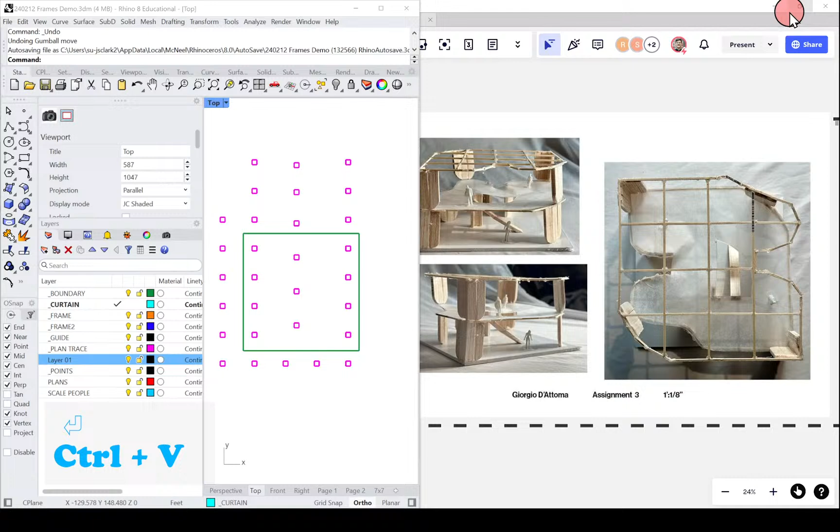The YouTube last semester, is it easier? I don't know, I can hit one button and it live streams, and with all the students in the annex, half the people watched live, half watched it on YouTube. And those streams just stay on YouTube. Exactly, yeah.

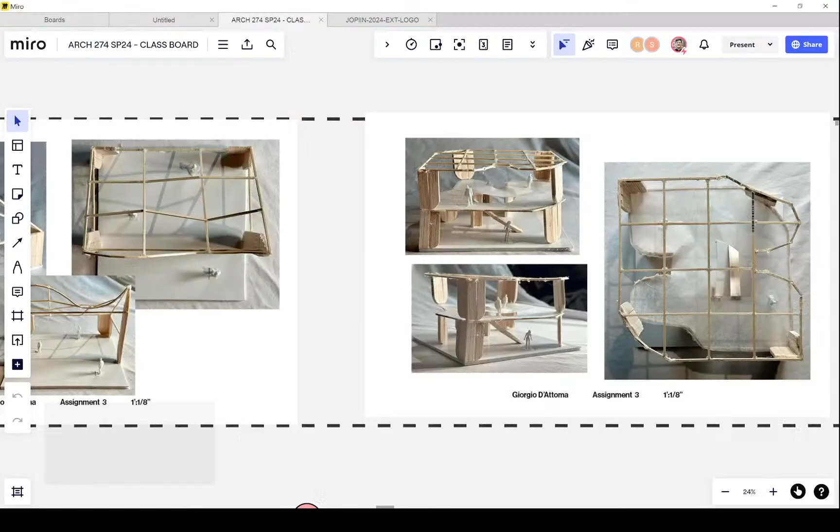First things first, the Miro board is really empty. Part of the agreement in the syllabus, which is a contract between you guys and the teachers, is that you guys are going to upload progress images every single week. So when we see empty Miro boards, we assume no progress.

It's very simple, I would like you guys to get in the habit every week. You could do it end of the day, Thursday is a great time. Set aside like 20 minutes maybe at the end of class on Thursday to document whatever it is that you did. Maybe it's on Friday, but at some point every week, make a documentation of what you did. It does not mean it has to be your quote final images of the models, or perfect renderings of your digital models. It's literally just screenshots and iPhone or Android photos of whatever you've got.

Progress. We're doing this not to torture you guys, but to turn you into productive, effective coworkers. When you guys graduate and start working in teams, if you have a habit already installed of constantly sharing, oversharing your work and your process, your bosses and your colleagues are going to be super grateful, and you will remain employed.

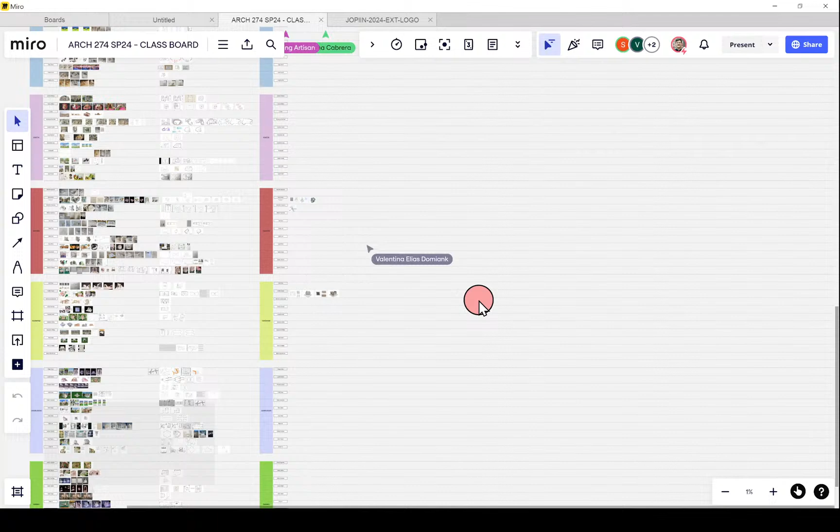If you're the type of person who says, no, I just work at my desk and I'm only going to show you when it's good and when I'm satisfied and when it's, quote, done, you will not be employed for very long. So this is kind of a way to set up healthy habits for your future employment, but also for just where we are right now, studio, in school. And your homework, if you guys need me to tell you, your homework in order to get a grade is to upload your progress. So please do so.

We see a couple on here, so for those of you who did upload something, fantastic. We love it.

What we're hoping to achieve by today is a few, using Giorgio as an example here, like 3 physical models. And when you've been testing these ideas, where we're remixing these 2 different plans together. This week, we would like you to first finish this, because I'm not seeing pictures, I'm gonna assume it's not done, so finish that.

But we're also gonna move into starting to craft some digital models, so some digital kind of mock-ups to help us think about how maybe these physical models can be created, but definitely to help us think about the next assignment. We're gonna have basically one more official assignment before the midterm, which is going to be like a digital drawing of one of these ideas.

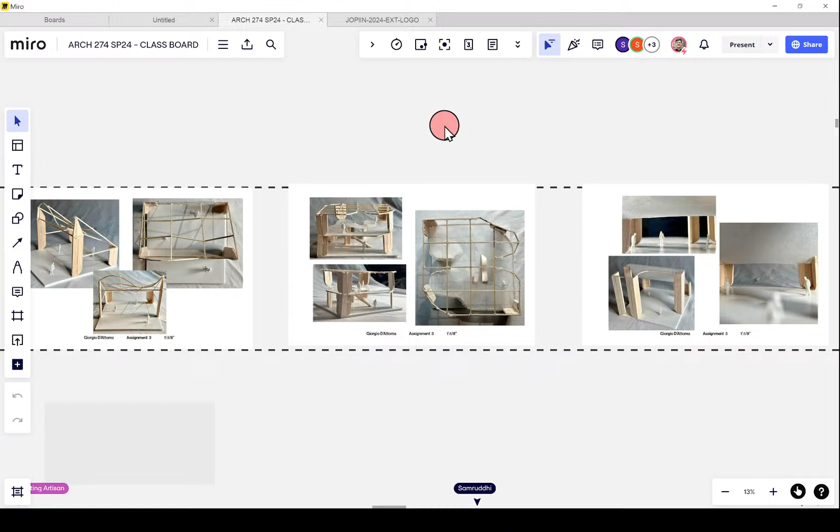So you've been kind of amassing a little family of ideas. You're going to eventually pick one, you're going to elaborate. But for this week, you're going to continue iterating, you're going to continue designing. So the goal for this week is to keep working, keep designing. Don't pick a favorite quite yet. You should be considering multiple options, okay?

I did want to maybe start with a little graphic novel here. I showed you guys some images last year from my friend Jimenez Lai, who runs the firm Bureau Spectacular. He wrote this graphic novel, Citizens of No Place, that imagines different kind of architectural conceits seen through the lens of 2 astronauts. It's basically a stand-in for him and his friend Andrew Kovacs to have arguments and discussions about architecture.

He uses the format of the graphic novel to kind of illuminate different qualities of architecture. And I use architecture in like a capital A sense, like embedded things that any architect, anyone who's been through school can get in a debate about. It's kind of the Socratic process here seen through the lens. I think this is Jimenez and this is Andrew, the big guy with the mustache. But this was a particular story about this kind of depressed figure.

There's a lot of depressed figures in his stories who is in space, so there's not really gravity. He's thinking about how this grid of space can deform to the human body, thinking about different programs or uses. This relates a bit to what we did last year with the body drawings for 172, thinking about how the human body may deform space if we privilege certain dimensions on it. These diagrams in particular are something me and Godone think you guys should contemplate and spend time looking at.

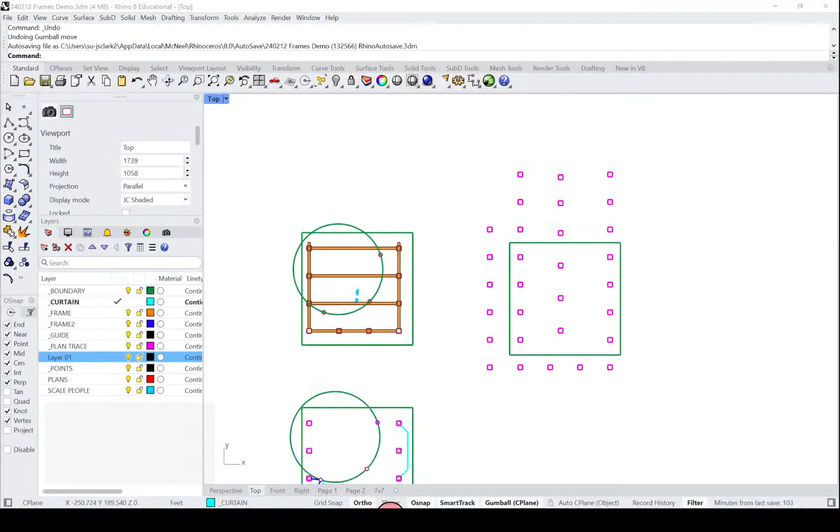This culminated in an installation in the gallery, a test fit of this idea, where there was a static grid, a perfect box grid of points made with string, with little tennis balls at the corners. You could walk in the gallery and push the tennis balls and it would deform the entire grid. We liked this idea that maybe you're starting with the basic grid from the precedents, and deforming them to think about how it might change into something different as you get more vertical.

So anyway, I just wanted to come back to the precedent here, the plans in Rhino, and make sure you guys are thinking about the proper scale and size of these things.

So again, this plan I brought in, and there's already a drawing where I can tell that if I type distance, and do the distance between here, it says 13 feet, based off of the drawing. I just traced this thing.

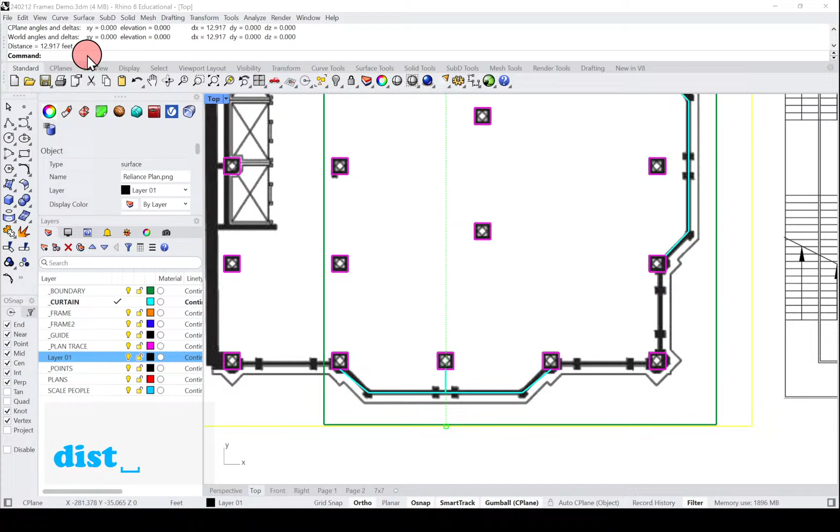This is the Reliance building on the left, and this is the MVRDV Expo. This is a fun one because every floor is a different type of structural truss.

The green box sitting here, this is like your square. This is the 48-foot by 48-foot square, which is a 6-inch by 6-inch by 6-inch square at 1/8 inch equals a foot scale, right? So 6 times 8 is 48. That's how we're getting this size.

So we can see if I overlay this on top of the plan, I'm only cutting out a little portion of it, just a little bit of this overall plan. Same deal for this big guy here, okay?

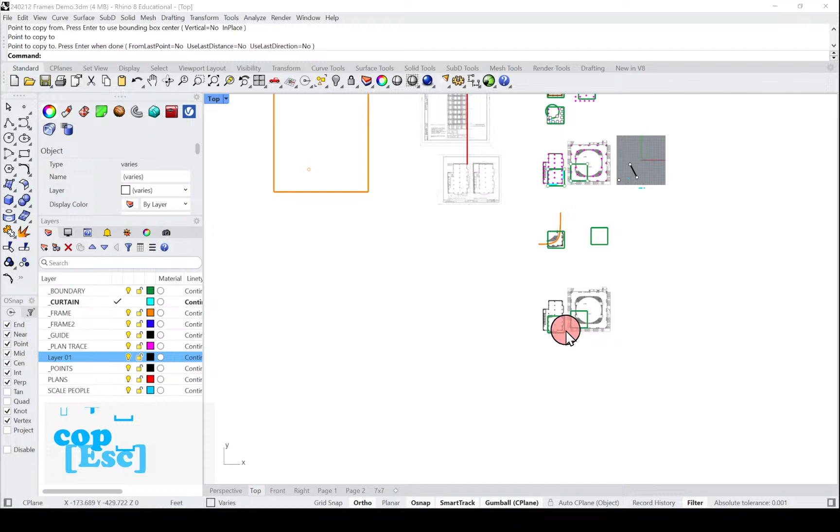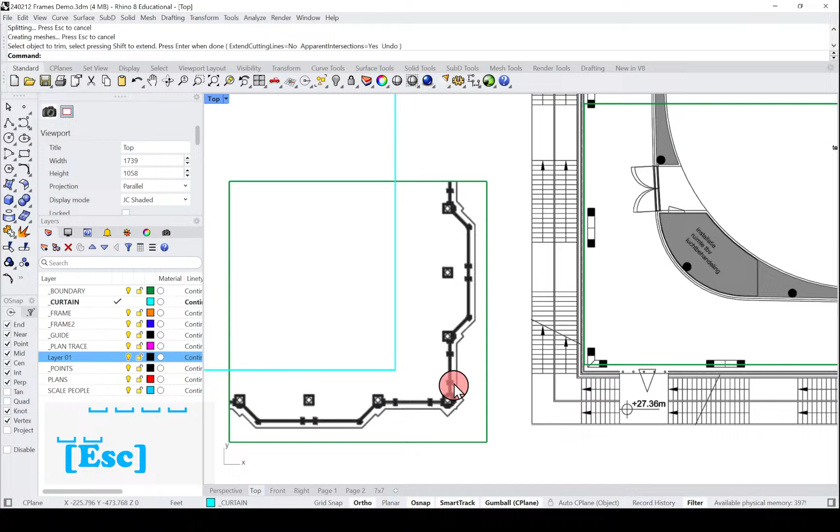So what I could do is take my plans, copy them down, and use, say, a rectangle, and the trim command, and trim out parts of this plan that I don't want. Like that, for example. Maybe I just want the outside of this, and I'm thinking about the relationship of these boxes to the curtain wall.

For this one, maybe I know that this floor plate, what looks like 2 little boxes, is actually because I'm cutting a floor plate, or cutting the plan through about 3 feet above the floor. This is actually a V-shaped truss, right? But I'm cutting through it a little higher, so it looks like 2 columns, 2 vertical things, but it's really from a center point going out to a V. And I should have brought my lines with.

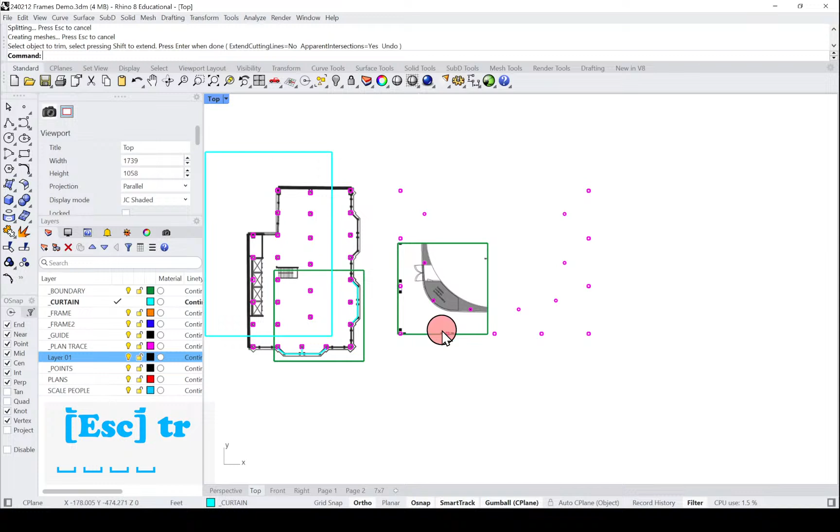The pink is just circles and squares already traced here. So again, I'm going to use the trim command, and trim out the outside. So I can just trim this one. I can imagine, and maybe delete some of these ones, because maybe I don't care about these columns so much.

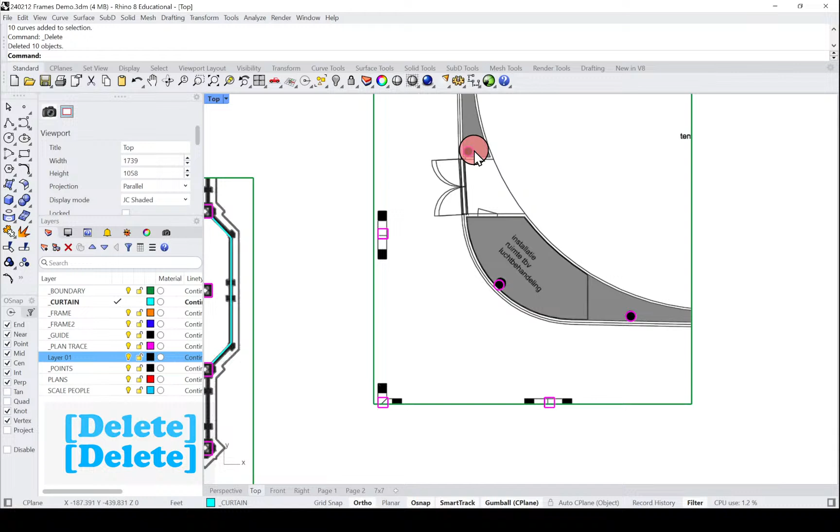And then in Rhino, you're always copying things off to the side. I'm maybe going to delete these, and I'm kind of left with some other squares here.

And I want you to really break it down to its basic points, or break the 3D information down to its basic 3D information. Remember, everything in Rhino is kind of starting from points. 2 points connected make a line. A line extruded creates a surface, and a surface extruded creates a box. That's kind of how we get to something that's 3D or volumetric. But we start from points.

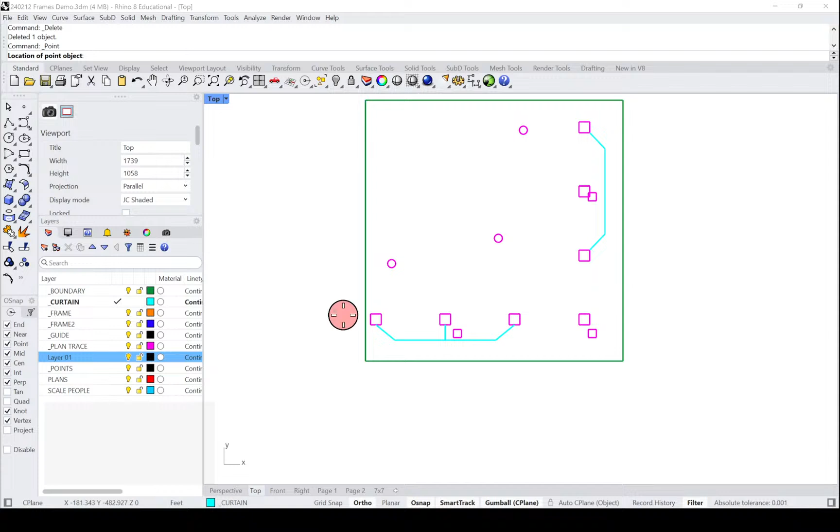And so maybe a way to think about this is to draw points. I've got a little layer here for points at the center point of these squares and these circles maybe.

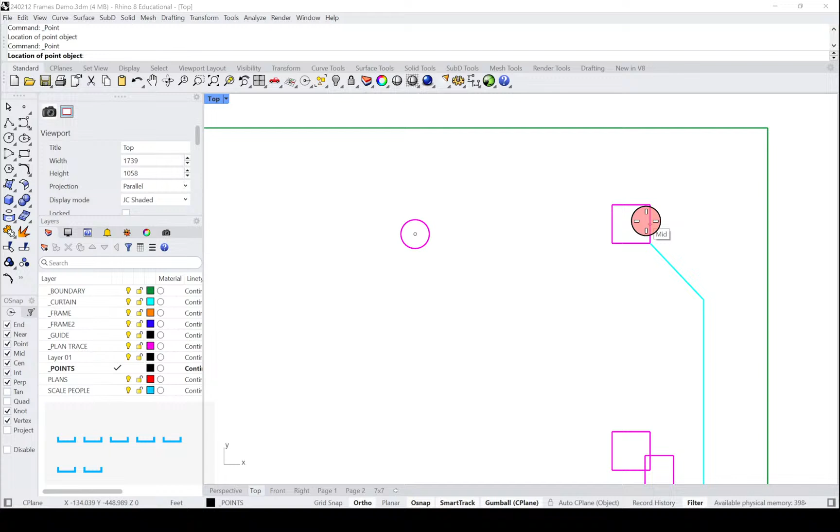You're always going to be choosing to ignore some information and privilege other information. So these little squares, I'm going to delete—these are from the MVRDV plan. It kind of fits on top of this, so I'm going to use the Reliance square plan with the MVRDV circular columns, mashing these together and thinking about how that opens up as I go vertically.

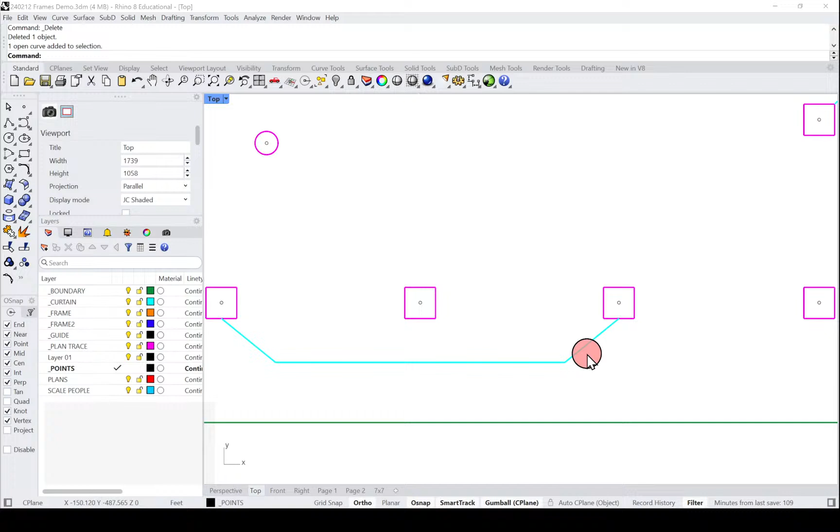The curtain in this case is the bay window, represented by this blue line. So I'm not modeling the mullions, and I'm not necessarily modeling the thickness of the wall yet. I'm just representing this 'curtain,' this wrapper that goes around the outside, as a single line.

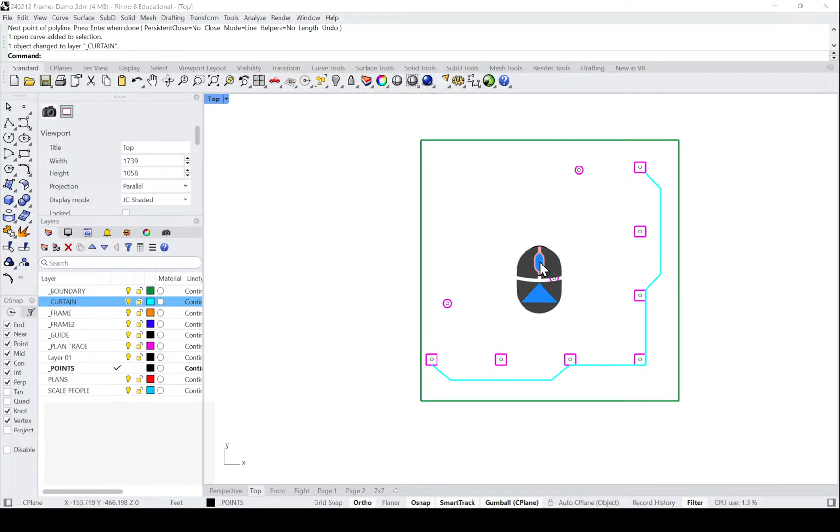Maybe this attaches around the outside to there. I can imagine this is more the curtain—we've got the curtain in blue, and then the columns, or the frames, in pink. Okay, so at this point we can do some things like measure your piece of wood.

So let's see, who's got a piece of wood here. You want to use a scale, but we can use a regular ruler and figure out how thick this stuff is. So this is an eighth—it's a foot in the narrow dimension and two feet in the other dimension. So one thing you can do is make little rectangles that are one foot by two foot.

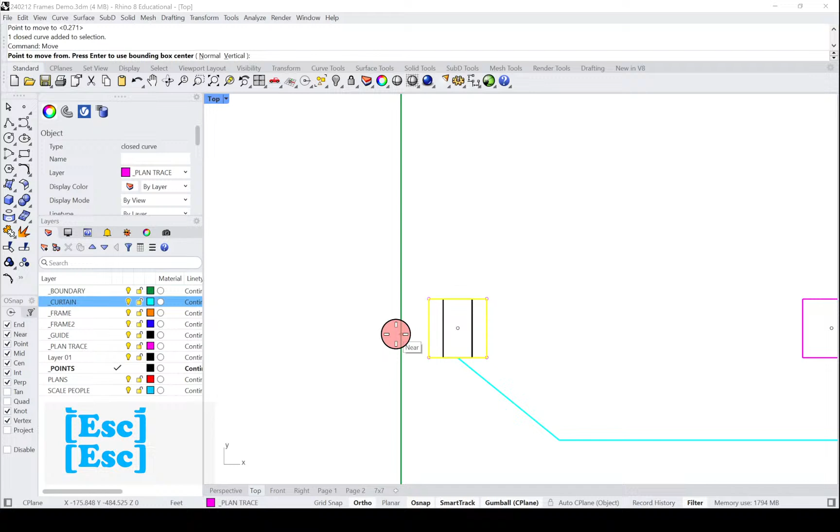And I could move this to my center point. So the pink is what I traced, but maybe now, since I'm making a new model out of this particular piece of wood, I'm going to make a new rectangle that's just that. And we can think about extruding this.

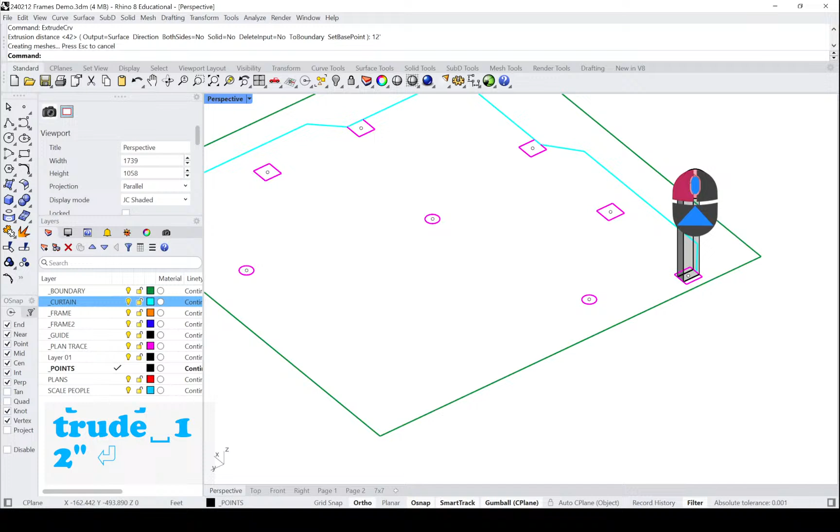So I'm in 3D now, taking this column and extruding it some height—I'm going to go 12 feet. So this would be like the first floor of my model. And at this point, I can start to copy.

Like last year, you can do a lot in Rhino with very basic commands—copy, copy, copy. You can also select points. Let's just select the points, too much stuff here, and I can copy those up as well, because maybe that'll be useful.

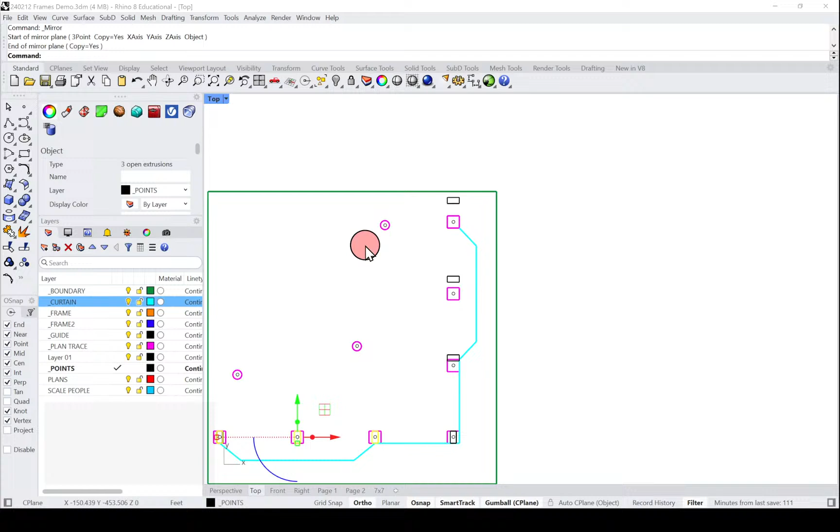Maybe you can use things like the mirror command. These are off a little bit—feel free to use the gumball to eyeball things and get them sort of close.

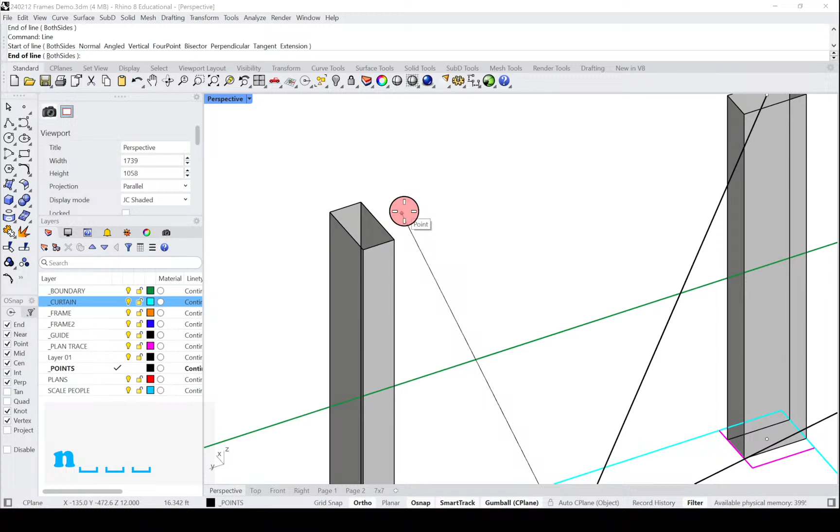But the idea being, now you can also start to draw lines that maybe connect these things to the center points, or maybe you draw lines that connect across this way.

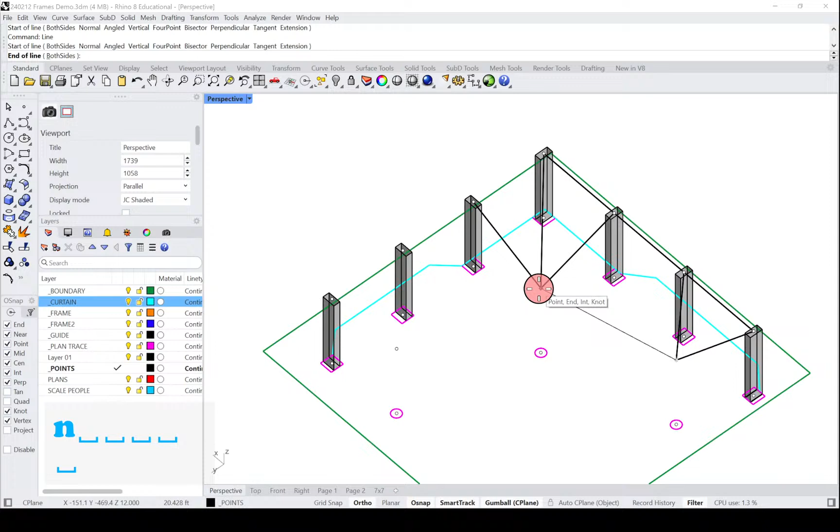Maybe we take all of our points here, we'll do a few more lines. I'm doing everything as straight lines because it's expensive to bend steel in curves, or wood for that matter.

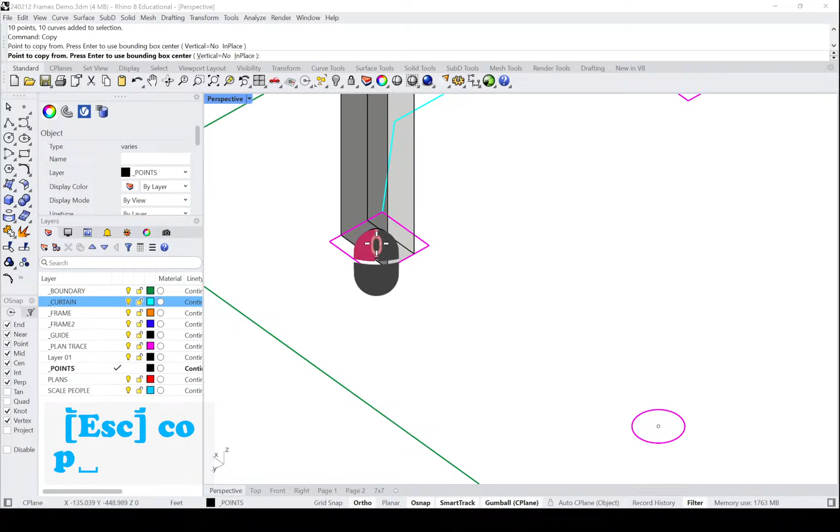I'm going to grab all of these and copy. Let's just keep the same 12 feet vertical spacing. Copy—same 12 feet vertical spacing.

And then now maybe I'm thinking back—the exterior of the expo pavilion has got those diagonal Warren trusses. So maybe I'm going to draw a line between these, or a line between the midpoint, so I start to get like a V-shaped truss thing.

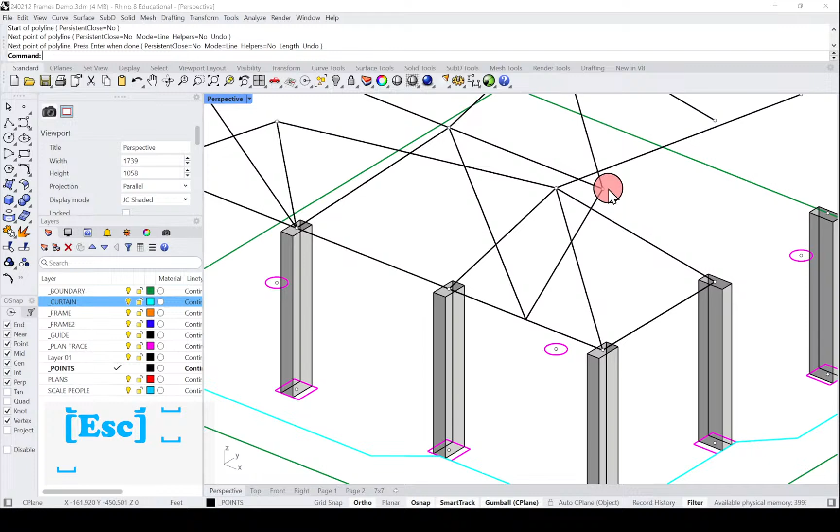Some more. We can use the copy command—we can copy this.

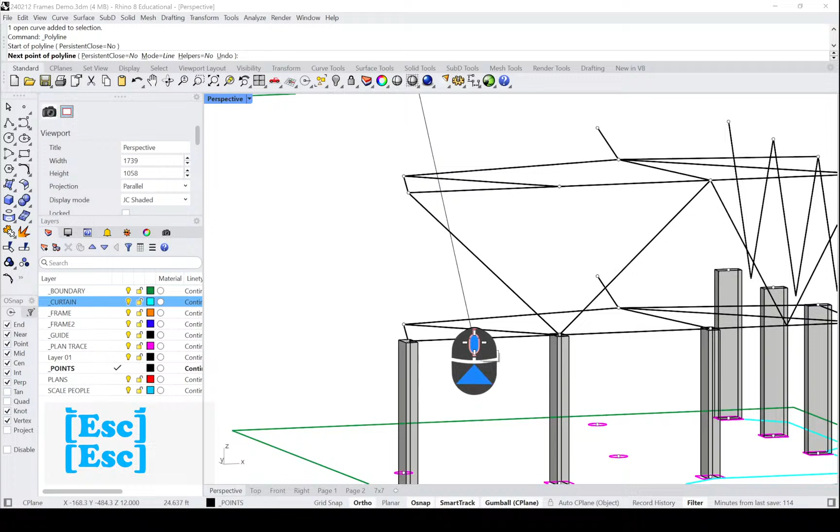Maybe I want some parts of these to be double height. And maybe these center columns are just what they are—straight columns that get extruded all the way to the vertical.

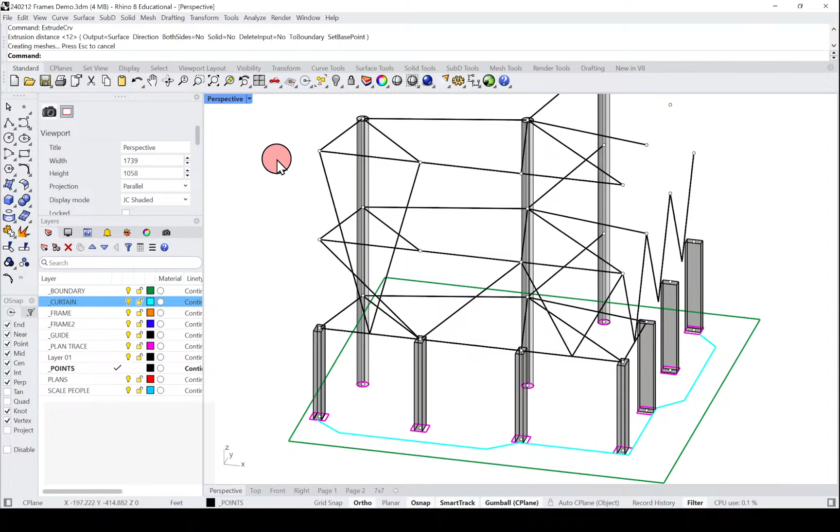And at this point, I'm going to show you guys later using Grasshopper, smarter ways to do this. But for now, for example, this piece of balsa wood that I have...

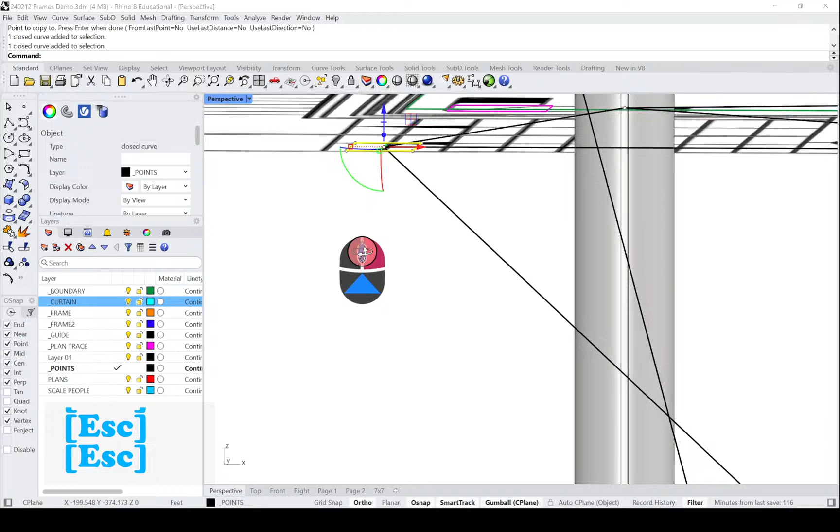If I want to move it along this line, I could—you can see the curve is not perfectly perpendicular with the line, so maybe I'd want to rotate it, but for these purposes, these are sketch models, we're moving fast, so let's just use the sweep command. I can sweep using the rail, the shape—let's see if this works. There we go, boom. So that gives us the shape as the outline.

And then you can change it. Say that you have a different piece of wood that is thicker—it's more square.

Or you're using, I'm seeing a lot of you guys using these bamboo sticks. What do you think, Gadon? Should we use these, or stick with the balsa? Well, they have two profiles. Yeah, so maybe these bamboo sticks are like your smaller profile, and you can have just a little circle that you extrude.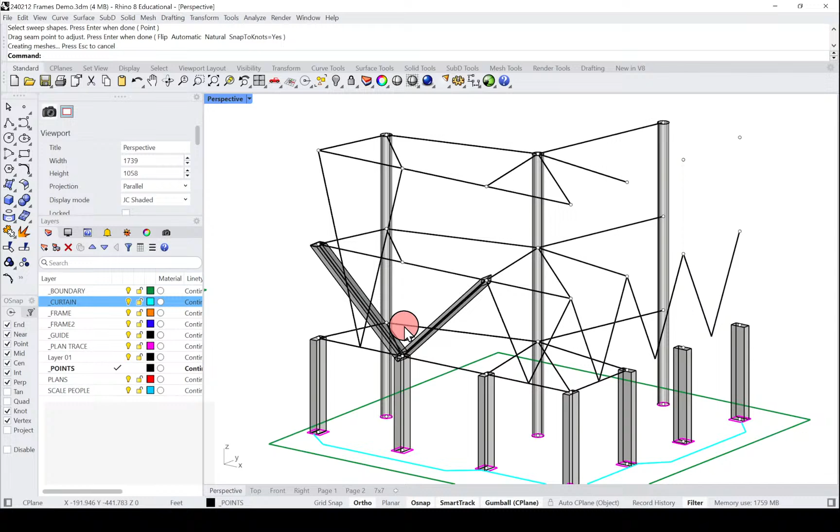Question: should we disregard the use of trace in the digital? Yeah, so for the trace, for example, this here, this is going to be my curtain. We can extrude it, right? And maybe that's there, and I copy it, and I don't want it to be in every floor.

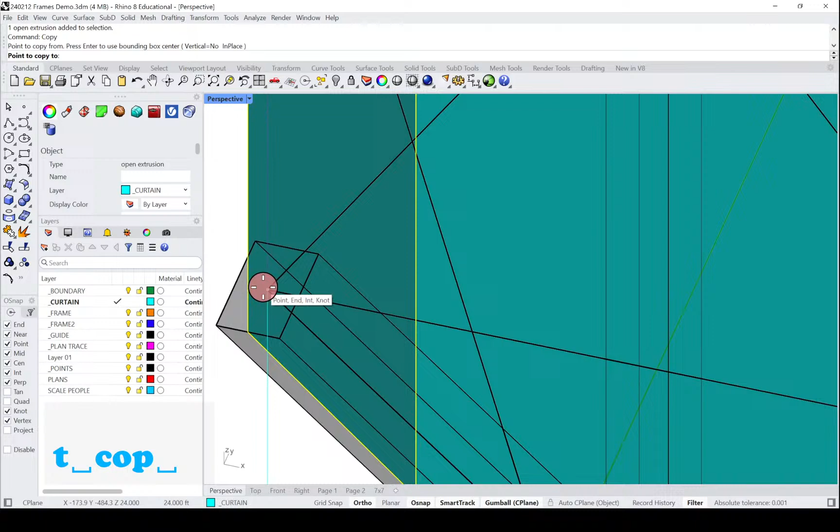So I'm going to skip a floor and go here. Here, I'm going to change it. At this point, I'm making my own building, so I'm not going to worry too much that this is exactly how the Reliance building looks. And maybe this gets squished down a little bit.

So I'm starting to think about this as I go into the top view. Let's get the one on the ground here. Copy. Maybe I rotate. Use the rotate command. And the scale command, same as last year, like scale, rotate.

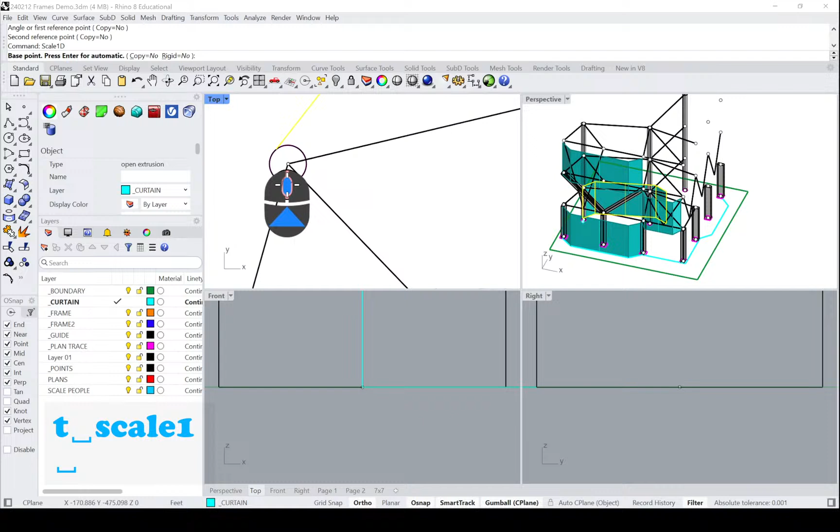Move. You can do a lot with just these. Mirror. So there I'm putting in, that's not great, but...

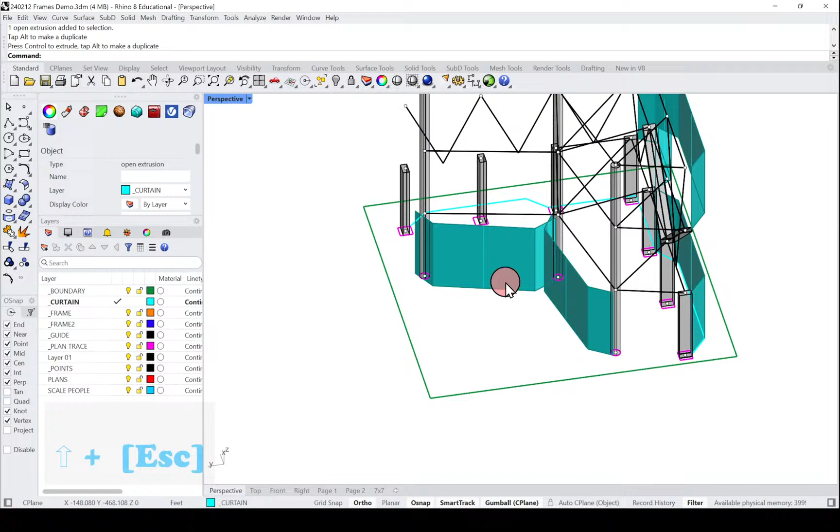Maybe these bays are starting to define maybe what could become an interior courtyard. Scale, 1D.

We're not worrying too much about modeling every single piece of the building, okay? And so there's a very good reason why I'm rendering this just as line drawings here, or let's go back to like pen mode. Mine's better. So it's just what's in gray being the wood, and what's in blue being trace paper.

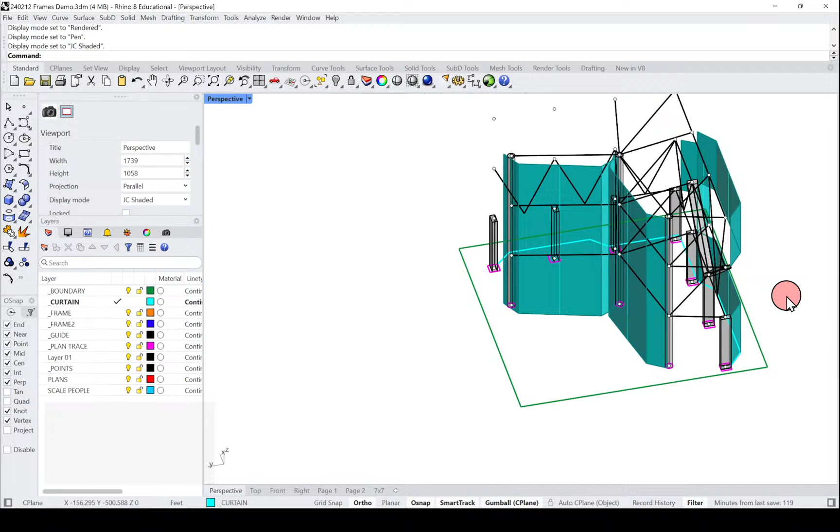We're not going to introduce too many new things, or too much detail. We don't want you to spend too much time modeling things that don't matter. Like the curtain is really just what it is. It's a wrapper for this thing.

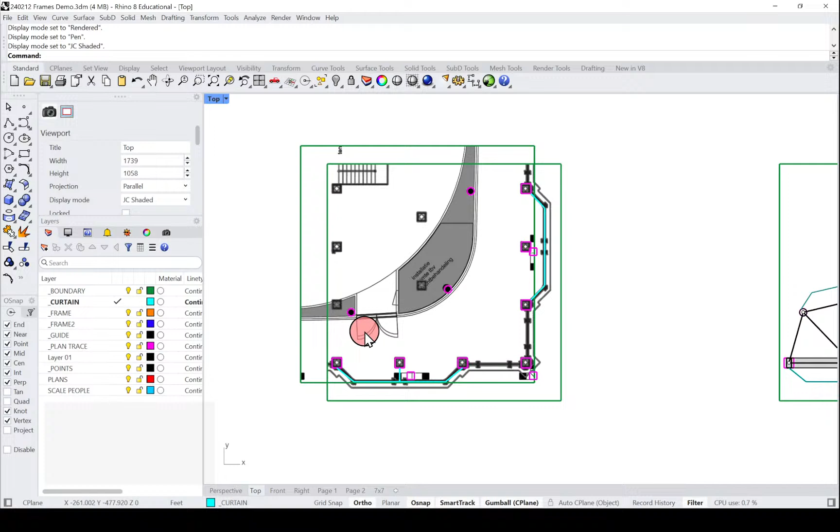So that's kind of like one way I would think about doing this, where you're literally just taking a tracing of maybe your collage plans. Maybe it's a tracing of what I kind of did here, like just a freestyle composition of the two plans going together. Or maybe you're just not tracing your plans and you're using them as a reference.

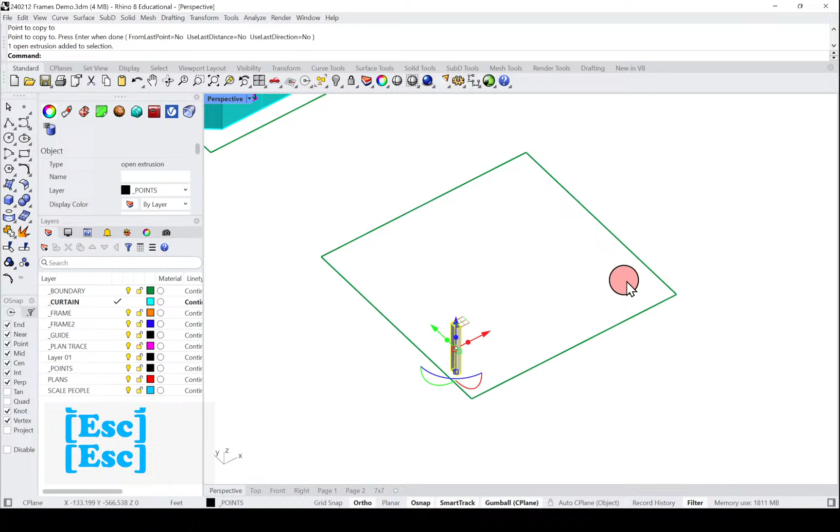So if I was to copy this over, like maybe this one, just the first floor, using the array command. Let's say I array it 4 times by 4 times, and the spacing is 12 feet by 12 feet. Bam, like there's a grid.

And then I was looking at the MVRDV one, for example, and these are gonna be circles that are extruded.

John, you talked about the importance of scale people in your model. Oh yeah, I didn't mention that. Thanks.

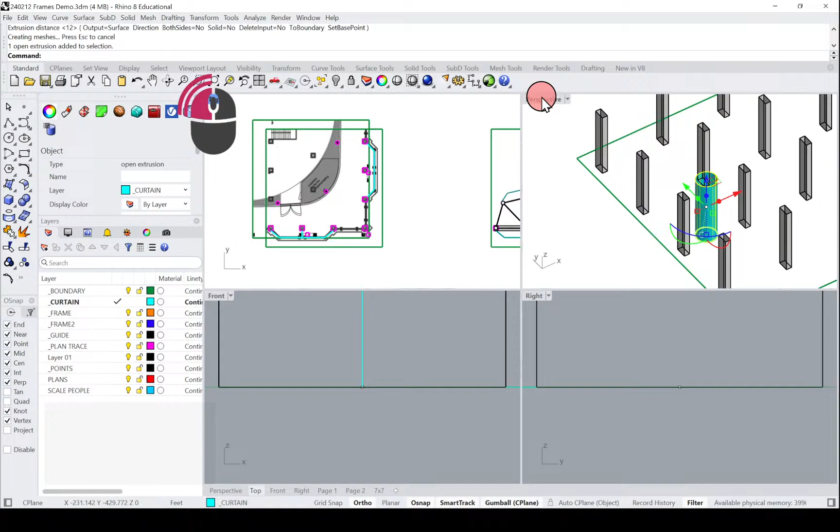You guys all have low poly 3D people, right? From last year? Somewhere. Yeah, use them. So these little scale people versus my building, you can see it's basically like a 50-foot tall structure.

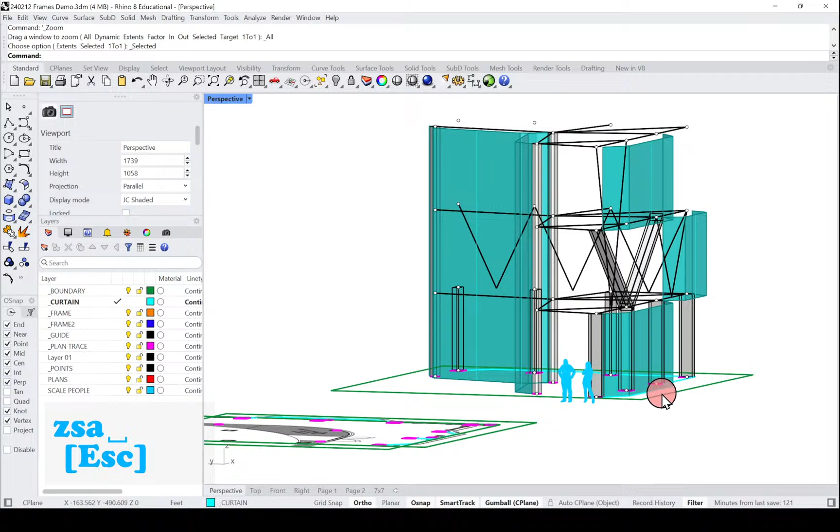In this case, I've chosen 12-foot floor-to-floors. The Reliance building, if you were to, I have it here, actually look at the elevation of it. So this is the elevation drawing, like off of the internet. Here's like a little scale bar, and I can use my distance command to double check the distance of one floor. And Rhino's telling me that it's like 13 3/4 feet.

There's actually like 2.5 feet of space for where the beams are, and then the rest of the space this is all glass, right? And so there's sort of a rhythm in the height. And so if you guys are like, I don't know what the heights are, you can look for elevations of your buildings and kind of work off that.

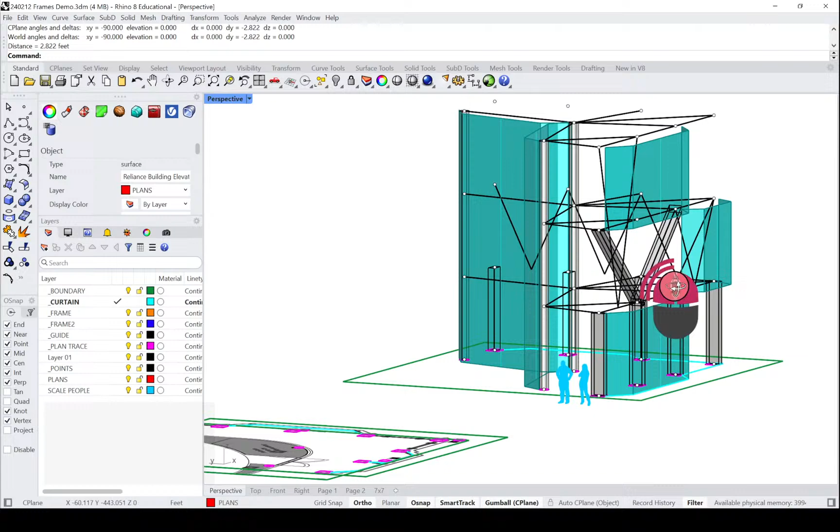Or what I would say is just let's divide up by 3. And so 12-ish feet are going to be a nice way to kind of fill the volume, right? But you should have scale people in your models. If you don't, I can add this file back to the templates folder for you guys to reference.

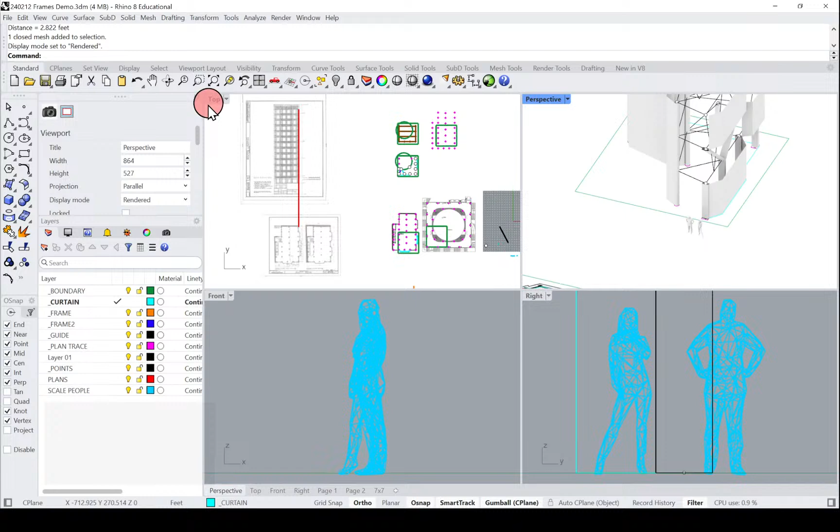All of the drawings are at 1/8 inch equals a foot. So if I was to make a floor plan of this thing, or look at my floor plan, and I was to print this on a piece of paper that was 11 by 17, the scale would be 1/8 inch equals a foot.

It'll fit better on 8.5 by 11. So, you know, everyone's models are that size. But if you're having kind of trouble thinking about how big this thing is, like put the people in there.

I don't want to keep going too long. I want you to chime in about some things that you're thinking about, or things that you would think about when you're going to do this, or if you were to do this assignment, things you would like them to consider.

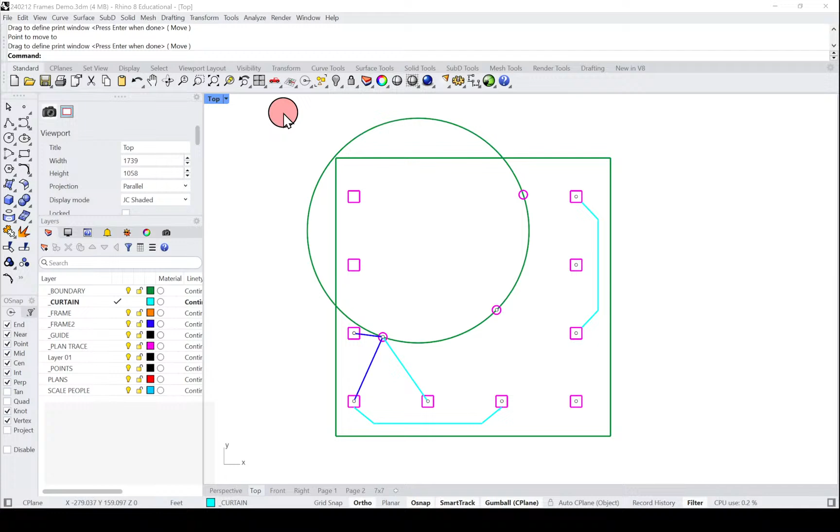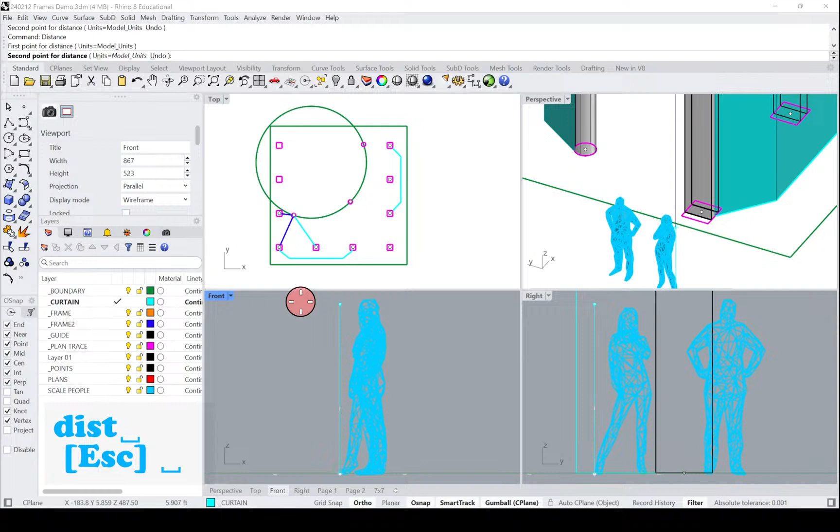Just to note at that point, the important thing is that you're modeling in real world scale, exporting to 1/8 inch drawings. I think it's important to keep modeling, thinking about the real world, because as you transition from this assignment to the next one, you'll be better positioned to move across assignments. Looking at this, what we're asking you to do, I think there's three clear ways to go about it.

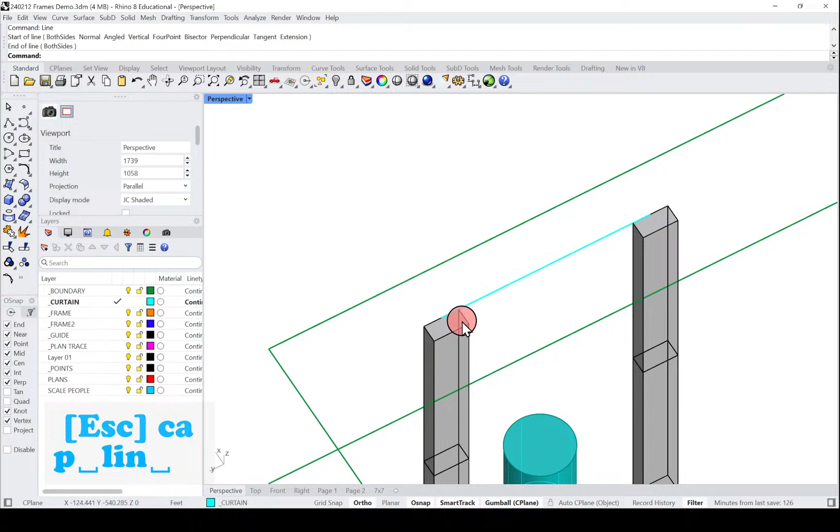And then the third method I would say is to establish a new grid that's based off of your precedent assignment, the mashup. Maybe you see that one column grid is oriented at 30 degrees and the other one is north-south perpendicular. So you can use these two orientations.

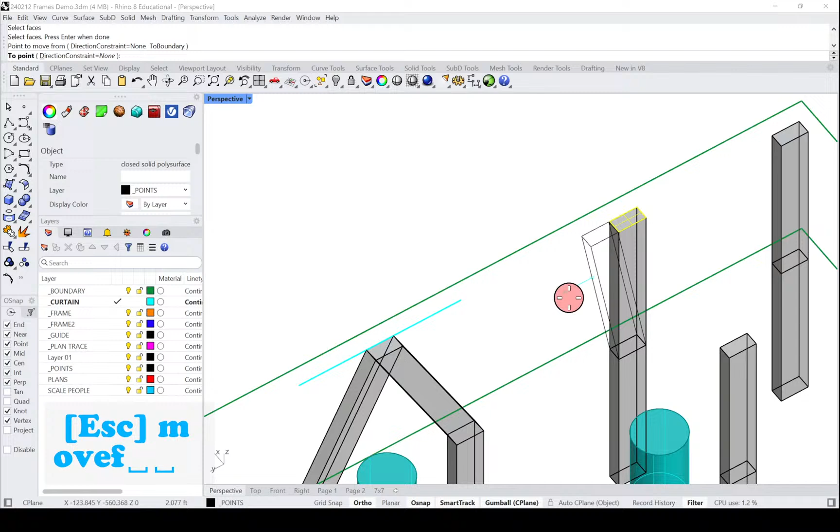You can use this new grid to start to lay out hypothetical column network and beam network. This, I think, the third method is maybe the most inventive of the three, and allows you to discover as you go. I could imagine a drawn grid related to plan, or related to elevation. You could prop it up and it becomes a truss network in itself. So to me, those are the three methods. There are probably ten others you could try, but those are the first three I would go after.

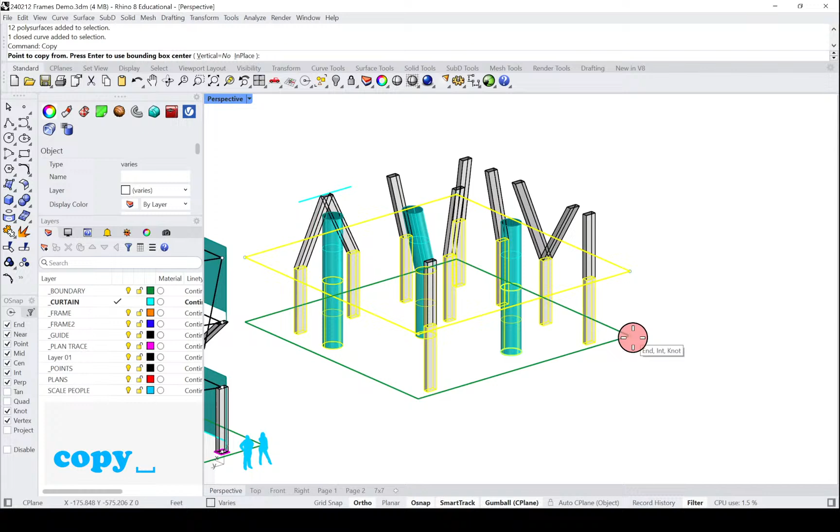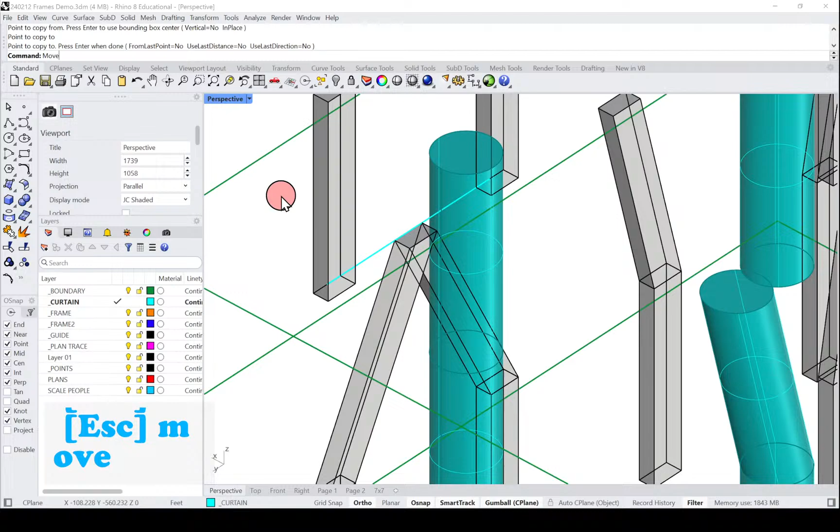And then as you're going, you're obviously inventing. So if you like what you're doing on a specific model, why not repeat it into another one and test it in a new direction? That's how I would approach working iteratively, to self-critique and analyze the moments you're crafting. Like if John says he likes this Y versus A column, maybe a model just becomes about those two bracing systems. So yeah, that's how I would approach the assignment.

And I think it will be more fun once you're in 3D. It typically is, I think for myself, that's kind of working handcrafted because it allows you to test things quicker at a much faster pace.

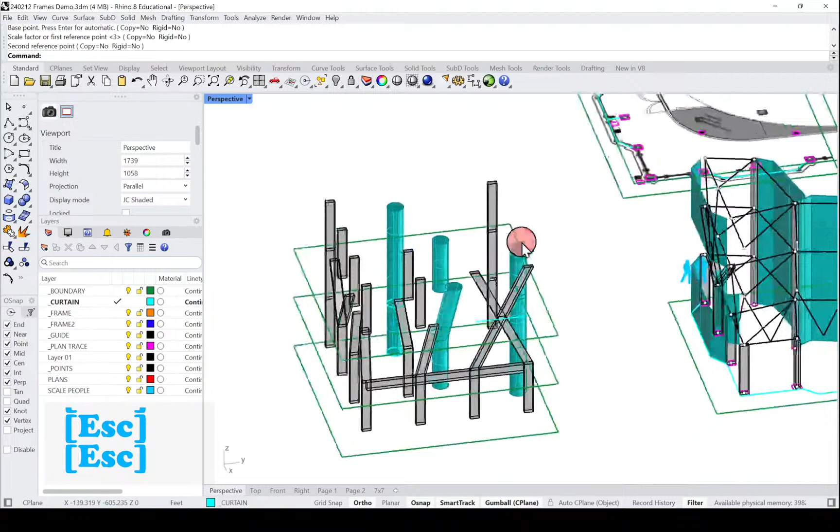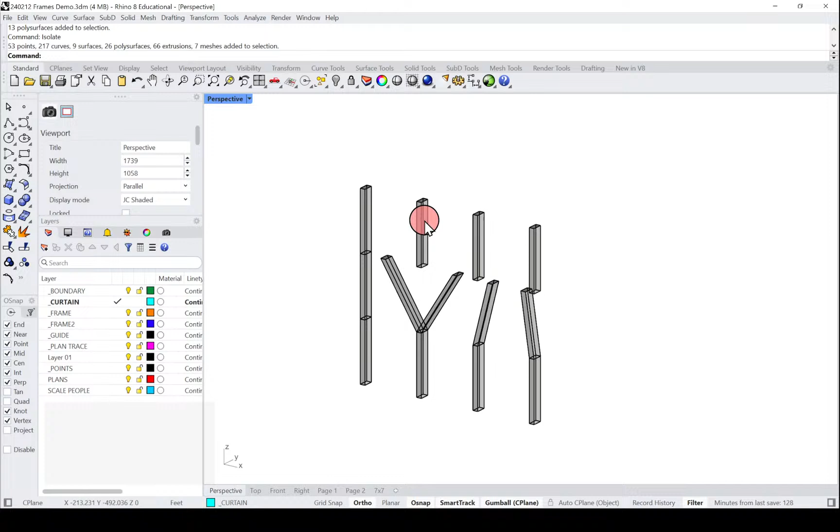What do you think, Kevin? Yeah, so another thing I'm doing here is I'm just using the move face command to kind of shear these things off to the side. For example, this wall over here, if I isolate it, here's a wall, and I just wanted these things to turn into Y's and K's, I could make points, have the points connect with lines, and use the sweep command to sweep my profiles. You guys would be thinking about the profiles.

Or I could just have the profile and then use the move face command. This is great, where I can click on a face, like the bottom of this, select maybe the midpoint, and move it over to there. And that's going to start to connect.

Because you guys are taking structures, you understand maybe the basic idea is even if we have a kind of cattywampus grid like this, if the forces can continue down, the engineers won't laugh. We can keep moving forward with our designs and engineers won't go crazy. We drive them a little bit crazy, but hopefully not too crazy.

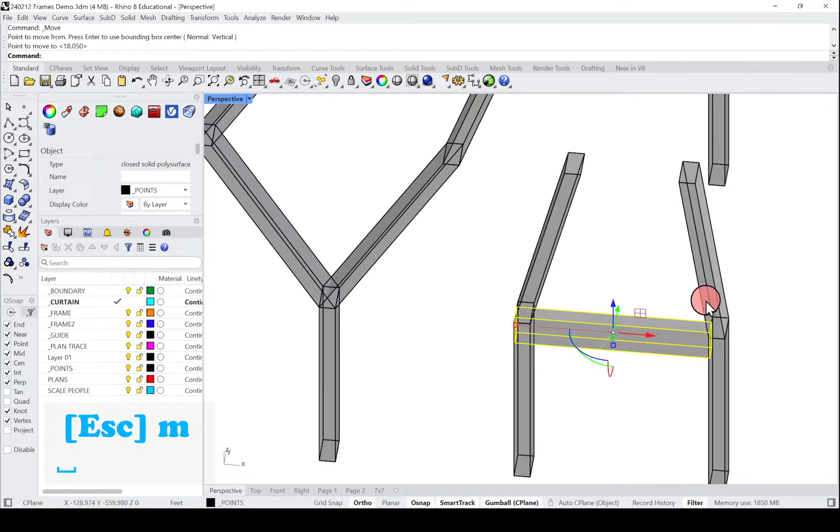And then scale 1D, scale one dimension, so it's basically we'll stretch things, and then copy things. And if you have a certain grid, like the 12-foot grid, it makes it a little bit easier.

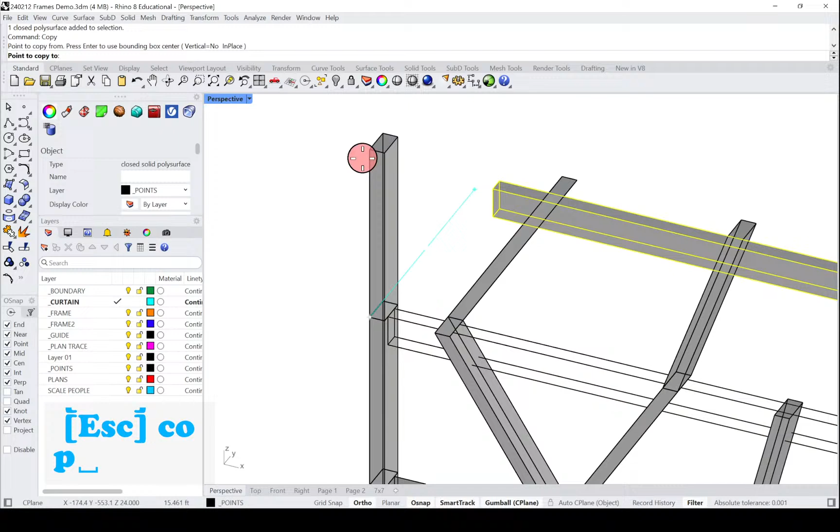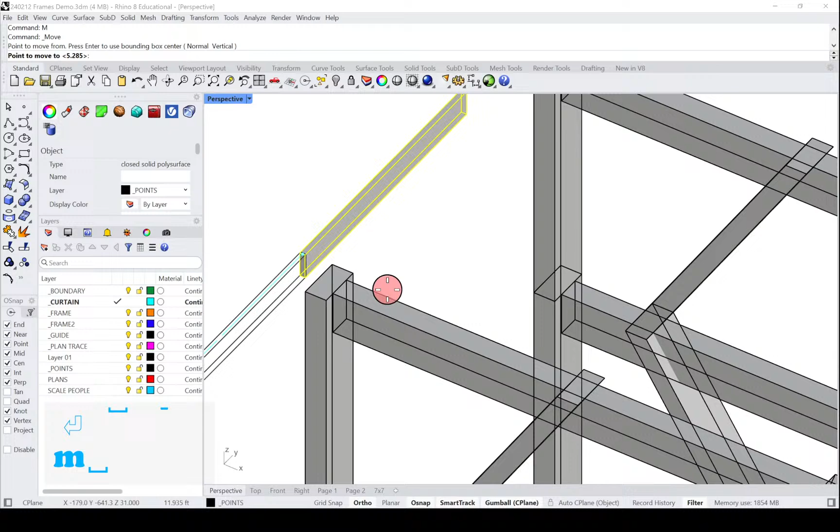Right now I'm still using a single thickness of material, just this thing. Maybe if I was to imagine two of these going across, and then my secondary—really what we're aiming you guys towards is posts and beams are thick, rafters and joists are thin, or tie beams are thin. So we can imagine this thing, if I scale 1D, is actually closer to, I don't know, 3 inches by call it 10 inches. Not that small. 14 inches. So I'm not being too scientific about this at this point.

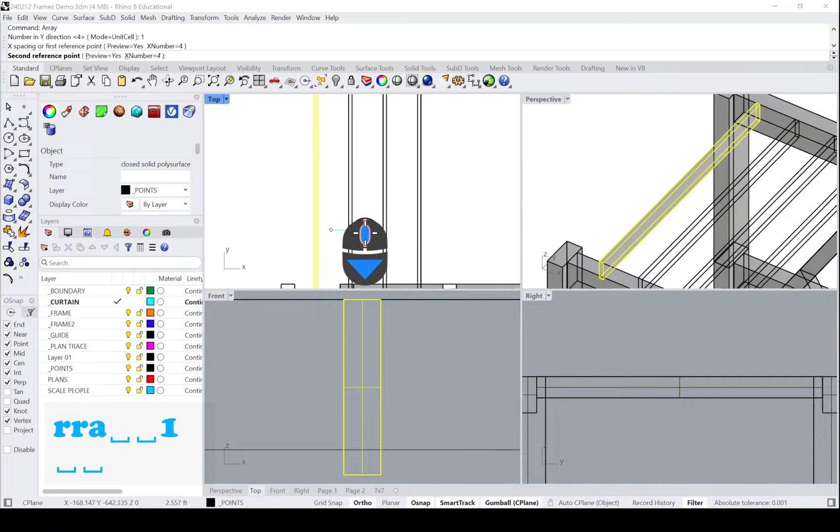And then I'm going to use the array command, so it's going to copy a bunch of times in the same direction, some distance. I want to do more—let's do 12.

And obviously this is way faster. At a certain point, to make that in sticks might have taken all afternoon, but you can whip something up pretty quickly in a few minutes. It's not pretty, but it's a good start. It's getting me thinking about how I might get closer to this sort of vibe.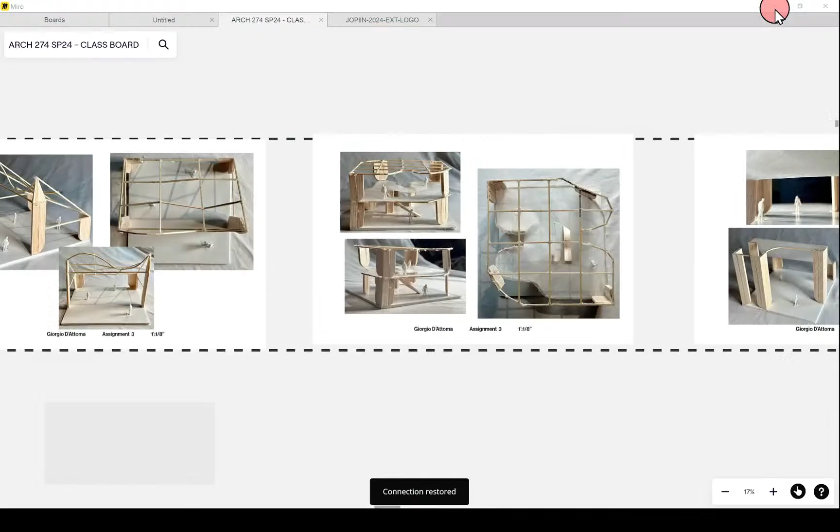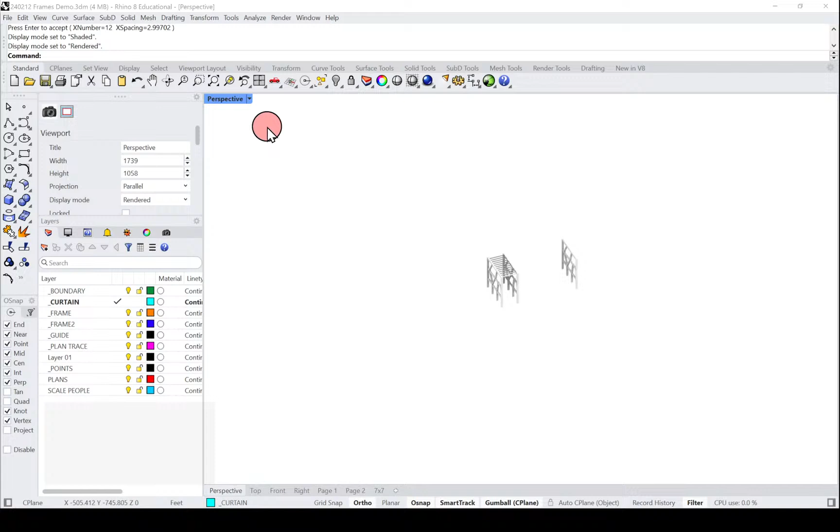Kind of like Giorgio's starting to do it a little bit, getting kinked off to the side, but we're missing some of the intermediate columns and stuff. Is this helpful? Kind of break it down a little bit. So if at this point you are way out in left field and totally just freestyling off of your collage plans, maybe you step back, re-look at the precedents, at the very least to get things right sized, thinking about is it 12 feet, is it 15 feet. But you also might learn something fun about the plans—for example, I was looking at this one.

Like the Reliance plan, I'm taking the corner here, but say I was to take somewhere in the middle. Here I start to learn, if I hide this, that the grid is all messed up. Like the ones on the outside match, but the ones on the inside don't. So maybe that gets really interesting for me to start to imagine.

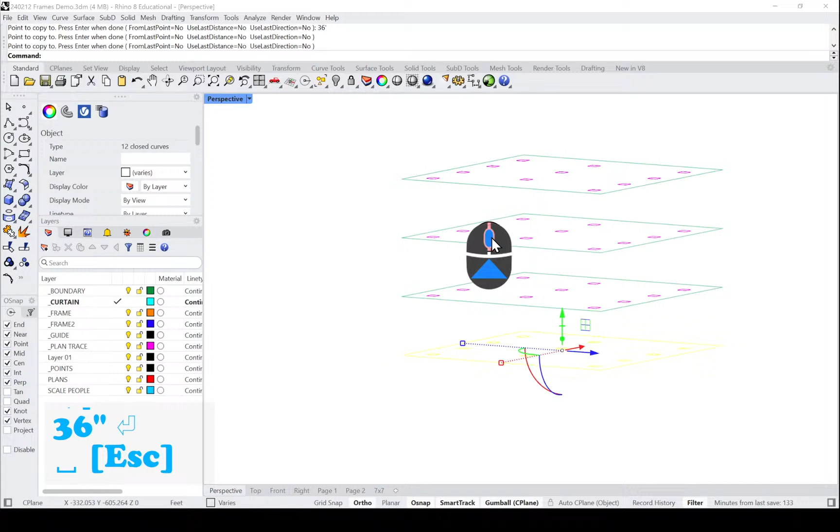Here's one. I'm going to copy it 3 times, 12 feet up, 12 feet, 24 feet, 36 feet. I'm going to take the middle one, or the first 2, I guess, and just rotate them 90 degrees.

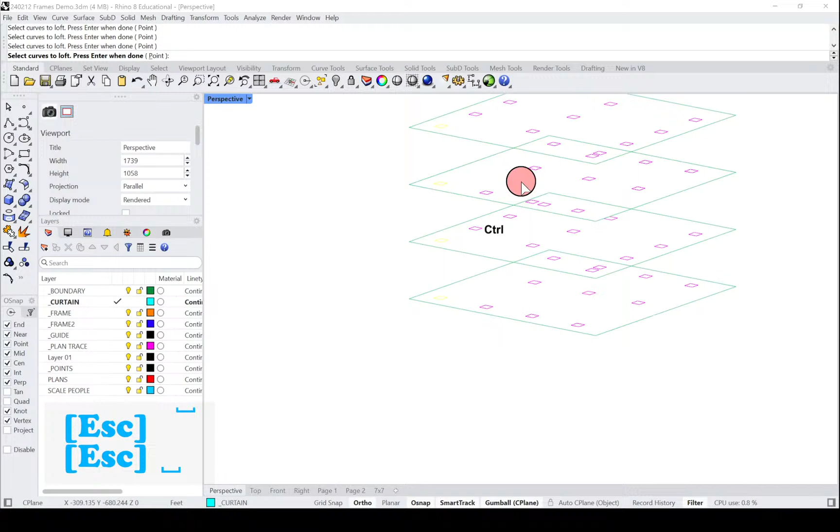And at this point, I could use loft commands maybe as another way to do it. Maybe I loft between these. Gives me a nice grid. Maybe I loft between... totally losing it.

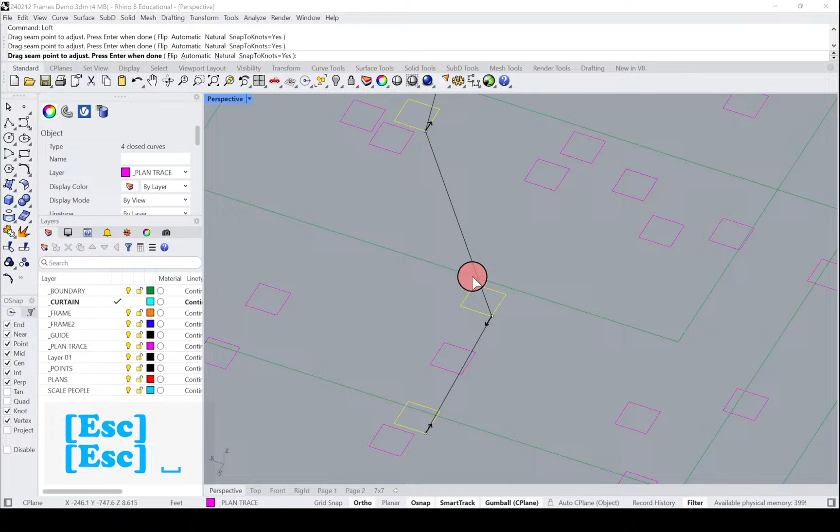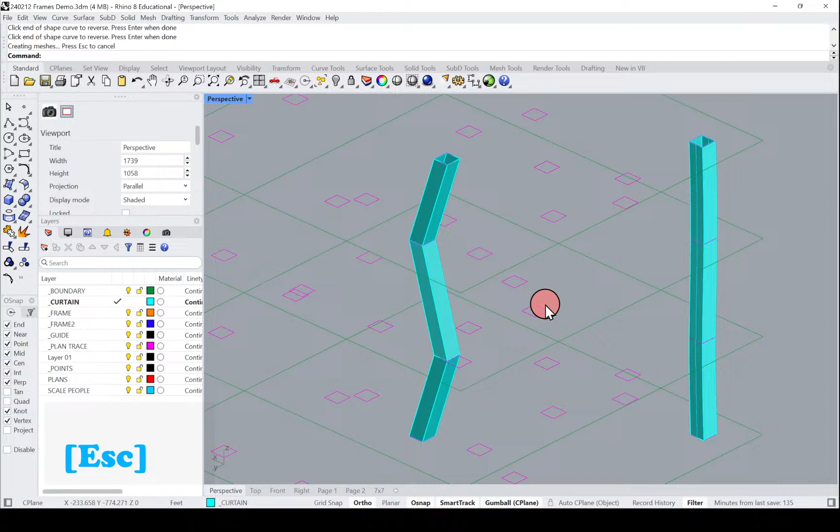Lofting is a little bit harder because you got to make sure your points are aligned. And it's a funny curvy loft, but again, you blow all your money on bending steel, so we can just turn our loft into straight sections. So then this thing is now this sort of zigzaggy thing, so I could repeat that process, and all I've taken is that Reliance building and rotated it as I go up, and I start to get this little bit more lively grid structure, let's say.

Okay, I'm pushing your patience, I know. Any questions?

So what we would like you guys to do this week is work through this, maybe through conversations with your TAs and conversations with Godot and myself, zero in on, maybe out of the physical models that you've made, one that is worth making some elaborations or iterations of in the computer, or feel free to go back to your sketchbook and take an idea from your sketchbook and elaborate it in the computer.

The goal is to continue building your collection or family of sketch models, okay? But to have kind of a start, so you have something in Rhino, because at the end, or next week, you guys are going to pick one and elaborate it inside of Rhino.

So you're going to spend more time making like a nicer version. Again, not meaning you're going to model all the details of it, but like a nicer frame and curtain model. Okay, and then we'll make a drawing of that, and that'll be what you're going to show for the midterm.

The midterm is kind of like a progress check-in to see where you guys are at. So there'll be another tutorial coming up that will show, to reiterate, we did it all in 172 last year, how to take Rhino models and pull them out into Illustrator and try to illustrate them, make them look pretty.

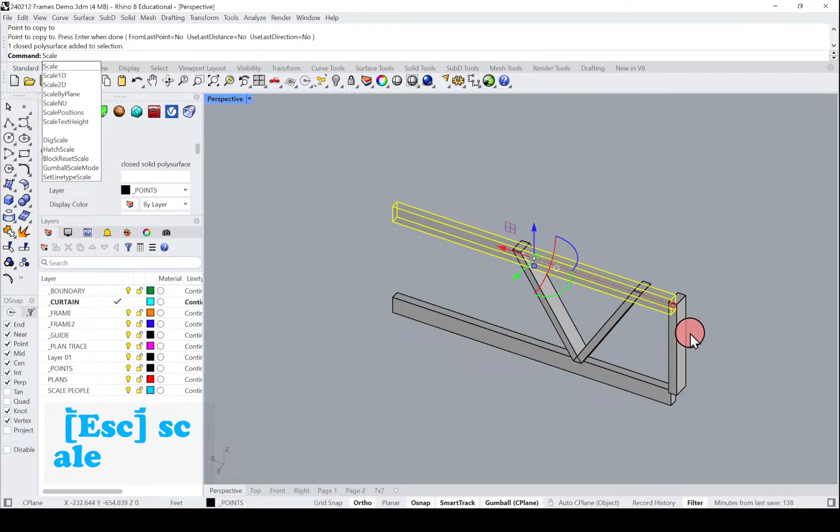And then another method that I don't think I mentioned is the unit method. So that's why columns get placed like that. It's okay to use that and repeat it across the model to create a unitized system. So you can invent a piece and then copy that piece around to create a space from it. And let me just show that real quick, 'cause that's worth talking about.

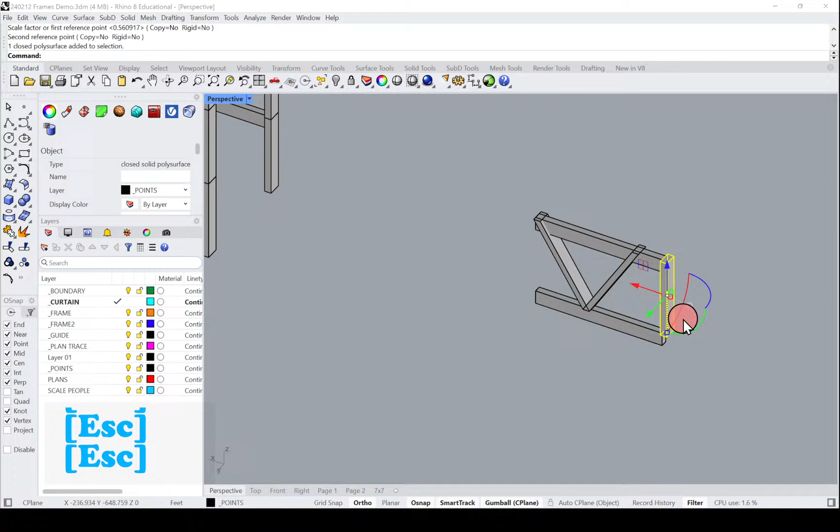Let's do both these the same. So like, here's a unit. It's not pretty at all, but let's call that a unit. So you could take this, we could group it, or we could even block it, but we don't need to block quite yet. Let's just say group, and then I could copy this thing.

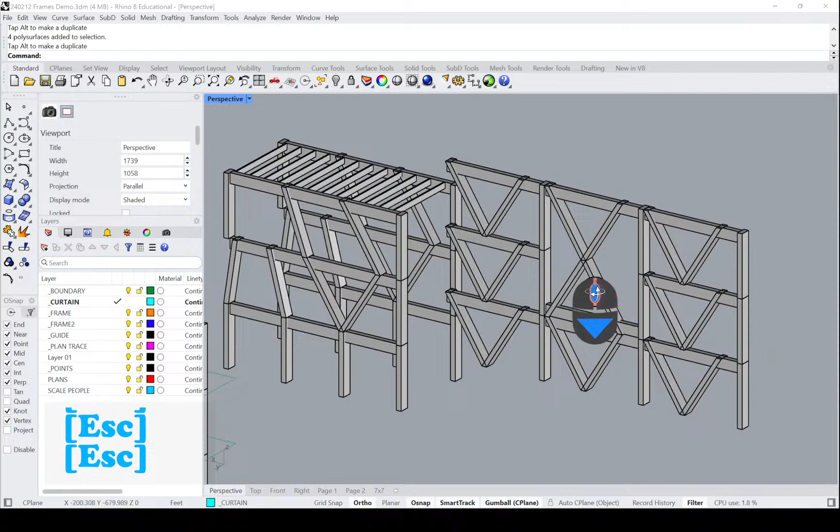All right, maybe got a bunch of these things. Maybe they start to copy. Maybe I'm rotating some of them somehow and breaking them apart. Like here's a unit that starts to get kind of interesting. Just through, it's not symmetrical, but through some interesting rotating, I can start to build it up into something that doesn't look like a single unit.

Sound good? Is this sound doable to you guys? Just help break it down a little bit. Okay, so let's get to work.